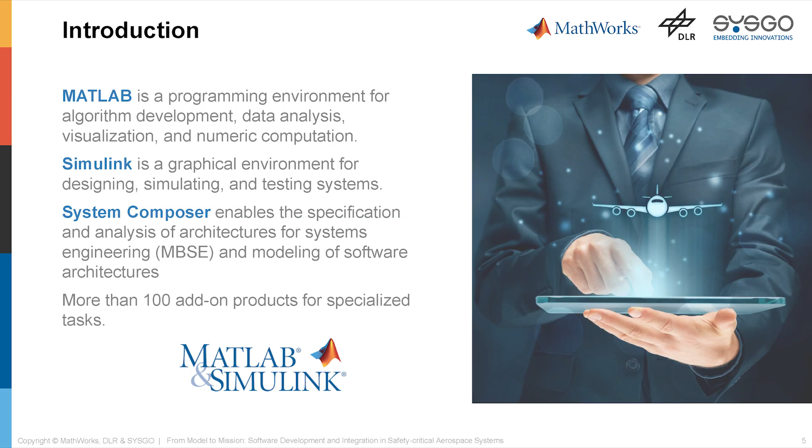Then at the end, what MathWorks does is create a unified environment where we can see System Composer as the main integrator and orchestrator, and it will connect the requirements management solutions, ours or third party. It will allow you to run analysis based on MATLAB, use all the power of Simulink and Stateflow. You have here Simulink Fault Analyzer, Simulink Test, all the verification tools, and bring designs also from third-party, legacy code, etc. So the idea is that you have an environment that will help you with this.

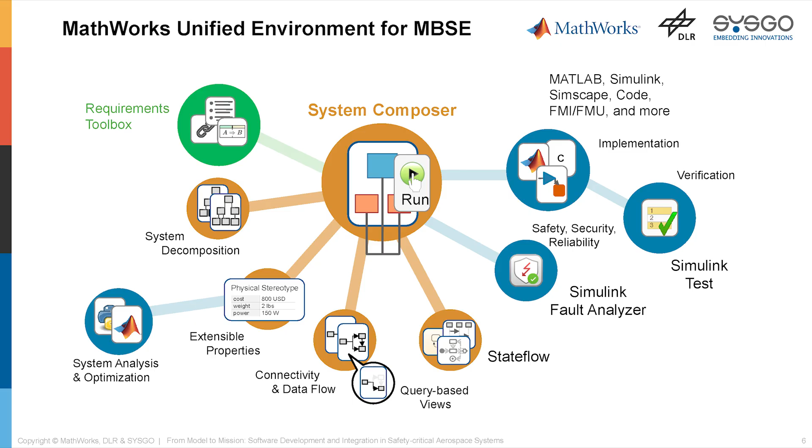As MathWorks, we collaborate a lot with many companies and centers. And of course, one of them is the German Aerospace Center, DLR. So Bojan Lukic is going to give you a few words about it. Hello, Bojan. Hello, Juan. Thank you for the introduction.

Coming to the introduction of the German Aerospace Center. So the German Aerospace Center, or in short DLR, is Germany's national space agency. I sometimes like to call it Germany's NASA for people who are not completely familiar with the institution. And we're doing various research, mostly in transportation, so space, aviation, but also automotive, but then also in energy, security, digitalization. At DLR, we're doing planning and implementing of the country's space program, and we develop sustainable solutions for societal challenges.

So at DLR, as a research institution, we're trying to publish as much of our work as possible and show our results in papers. So if you're interested in our work in general, I recommend looking at our papers where we show more technical details of our work.

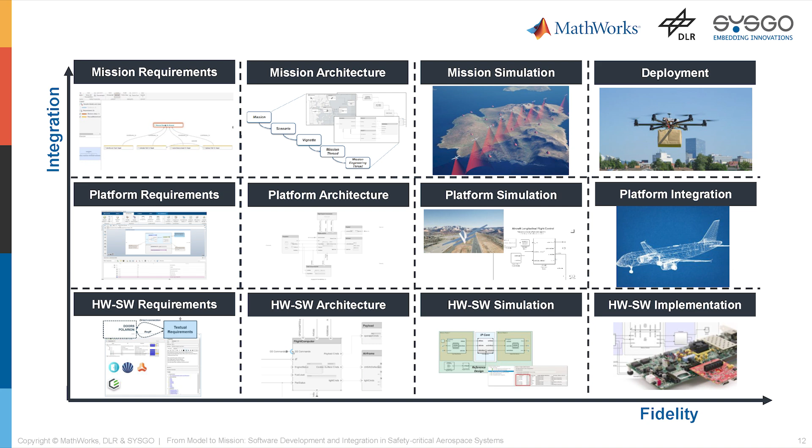So we do not need to have all levels of readiness to move around the canvas. What is very powerful is that we can actually start integrating early, we can start validating early, and this is one of the main advantages of model-based design, shifting left and doing things earlier. Today, we are not going to talk about the whole design lifecycle, but we are going to touch systems and software design all the way until the integration with a real-time operating system, PikeOS, that is designed by SYSGO.

Since we are today talking about systems integration and software architectures, we need to mention, like Franz introduced already, what IMA, or Integrated Modular Avionics, is. IMA is an aircraft electronics architecture that consolidates many previously separated avionics functions onto shared computing resources. Instead of having one dedicated computer per function, the old federated model, IMA hosts multiple avionics applications on common processing modules. This is an approach that has been used for the A380, A350, F-35, and so on.

This in general requires following standards like ARINC 664, ARINC 653 for partitioning. We will see a lot more later. And then the application that we will show today, and Bojan will explain a bit later, is how being able to reconfigure dynamically at this level can be a great asset to increase performance, but also safety.

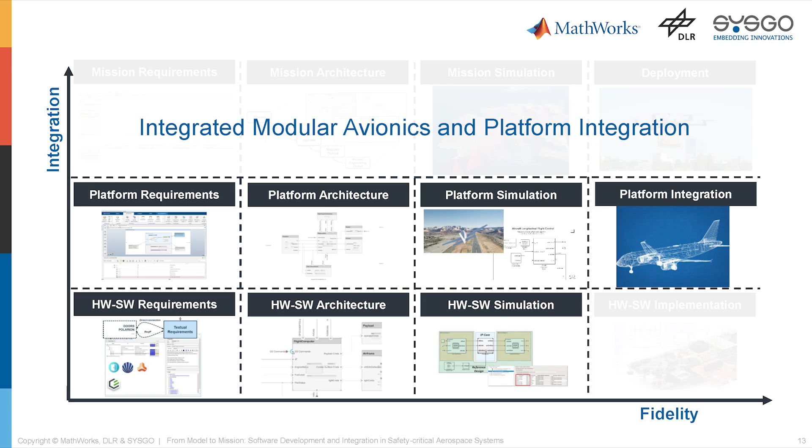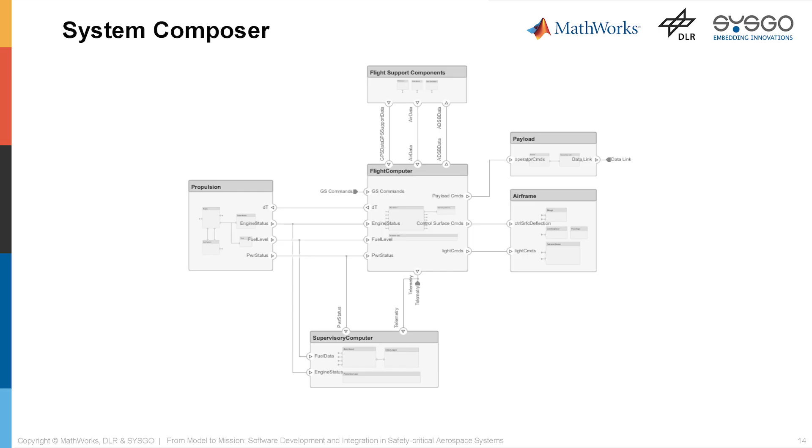But before Bojan explains this in more detail, I would like to show a bit of how we start capturing these designs. For that, let me introduce what System Composer is. I already mentioned it a bit as an orchestrator, as this integration platform. Remember, this is a layer on top of Simulink. In this case, this is just showing a small example of an architecture of a drone. In System Composer, one can capture a certain behavior using, for instance, activity diagrams. We can also capture these using sequence diagrams.

Then, since it is expected that we will have complex models with different layers, with many blocks, it is also possible to have different views. We can extract different views from these. What does this mean? I can extract only certain parts of my model. I can extract only the functional level. I can extract the physical level, etc.

Then you can create, for example, a functional architecture and physical, like I said, and then using the allocation editor, you can assign those different layers, and then you can play with different scenarios. And this is very important because one of the things that you can do is capturing metadata from your models. This will be very important to capture what we will see later, right?

The software architecture, that is something that we can convert into something that PikeOS can deal with. And this metadata is captured via stereotypes. What is also very, very powerful is that MATLAB has an API that can read and write from these stereotypes. So you have all the never-ending analysis possibilities that MATLAB is providing. So you see a couple of features from what System Composer can do and when to use it.

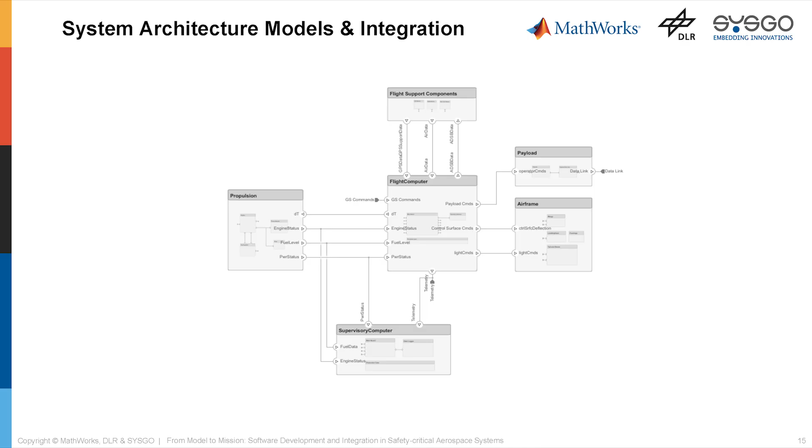Then, since we're talking about fidelity and integration, imagine that you have a model in System Composer. This is exactly the same model as before, but you have different levels of readiness from the different components. So you could connect your model directly to the flight control computer, provided that you have an implementation already. This is, for example, using hardware-in-the-loop fashion.

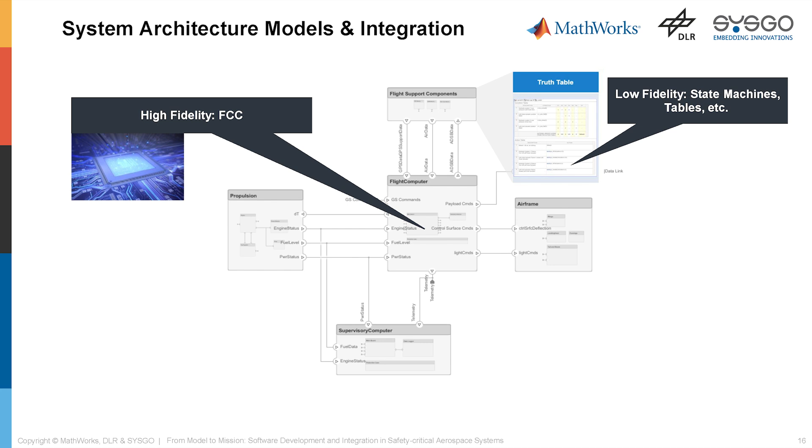But then you might have other parts that are represented only by simple state machines or truth tables, or you might have already some detailed behavioral models in Simulink of your algorithms. Of course, within Simulink, you can have different levels of fidelity as well. Or you could even have code. You might have some legacy code. You might have other models that are coming from other tools and that you're bringing using FMI or FMU.

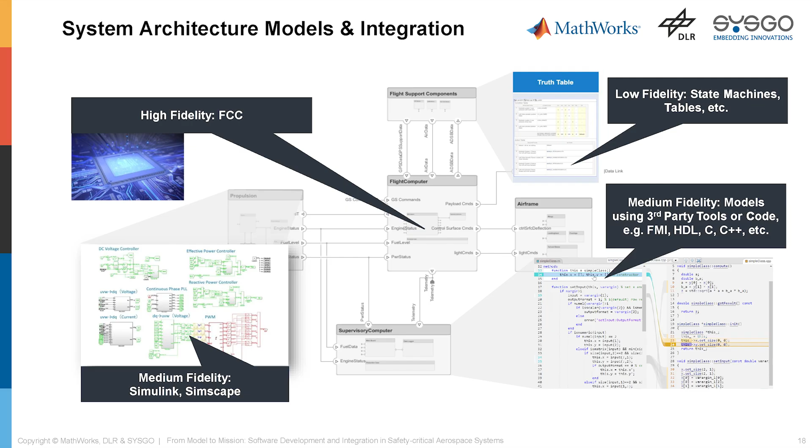So the idea, once again, is that you can architect your system or your system of systems in System Composer, and then you can run simulations from there, mixing these levels of fidelity. This is very powerful. At the same time, we can go one step farther. I already mentioned the hardware in the loop. Well, via hardware in the loop, we can bring the human in the loop, for example.

If we have a real-time machine, in this case, this is the drone actually connected with Speedgoat, and then we have a human in the loop that is controlling the drone. We also have, of course, the connection with the visualization and 3D environments. So once again, the idea is having the different levels of fidelity can be mixed, and that we can go and iterate and add different variants. We can add different levels of readiness, and then we can continue working with this.

But then what we're going to see today is what it means to have all these, capturing an architecture that can be an IMA architecture, and how it could be reconfigured. So, Bojan, I think if you can explain a bit more what this means, this would be very illustrative.

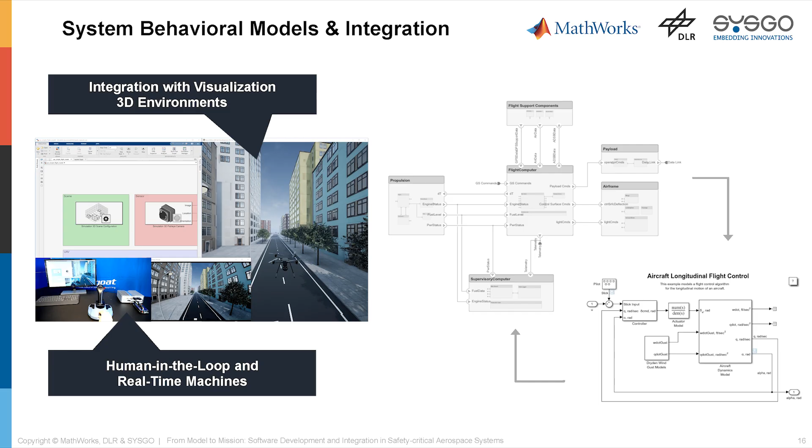Yes, thank you, Juan. So we heard now from Juan the main theme of this presentation and the platform that we're working with, which is Integrated Modular Avionics. But to demonstrate further how we can develop such a system with the previously introduced tools, we would like to introduce a use case, which is dynamic reconfiguration.

What is dynamic reconfiguration? So simply said, in the context of safety critical systems, dynamic reconfiguration is the reconfiguration of functions or applications within the system. And it is used for improved resilience and dependability of the system. And it enables the system to adapt to unforeseen conditions such as faults and maintain safe operation.

So if we think about machine learning algorithms, which are talked about a lot recently, and the idea of using machine learning algorithms and more autonomy in avionics systems in the future, we might want to add some kind of safety net or safety layer, which could be dynamic reconfiguration. So in case this autonomous component in our system goes rogue or has some faults, we can fall back to a component which is maybe safer, and this component can then take over functionality again in our system.

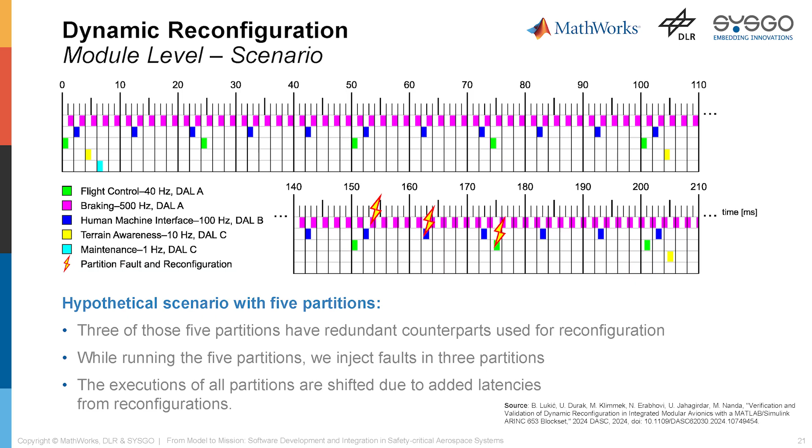So we have to think about the added overhead when we do something like reconfiguration. We can't just say, okay, here's our system, we would like to have a safety net, we're doing dynamic reconfiguration to make the system more dependable. No, we also have to think about the implications of that. So there's going to be some added overheads because we're using additional functionalities to do the reconfiguration and set up spare partitions, for example. But this is just one example. I added another reference here at the bottom right of this slide, which you could, of course, also check out.

And dynamic reconfiguration is also aligned with a lot of standards and guidances found in aerospace and especially aviation and avionics, like, for example, DO-297, which specifically talks about configuration data, which may be used for adaptation of the software, or ARP 4754 and 4761, which talk about redundancy, monitoring, and partitioning, as well as component failure and reconfiguration scenarios coming from that.

And coming back to the overarching topic, so Juan talked before about modeling the overall software architecture first on a high level, maybe with a single source of truth methodology, and then exporting the metadata and generated code from that, which we can do from Simulink as well. And we're also doing this here, which we're going to show in the demonstration later.

This metadata and the artifacts can be imported in CODEO, which is SYSGO's integrated development environment, to create a PikeOS image, which can then be loaded on a target platform. But before we show the demonstration, Matthias is going to show us a little more PikeOS.

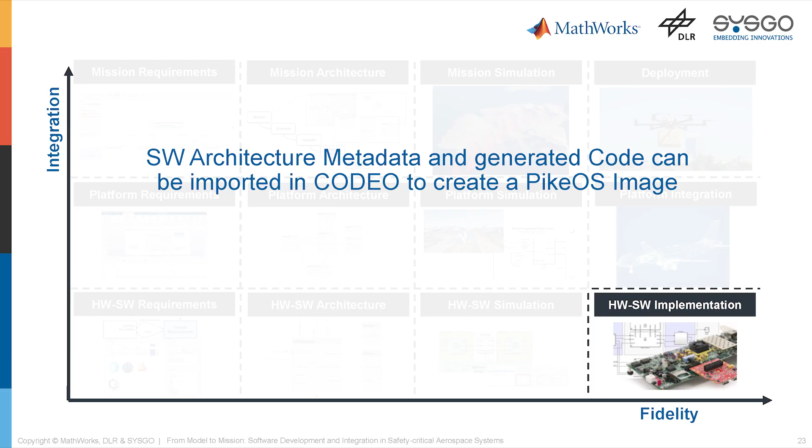Thank you, Bojan. I will start with an introduction to PikeOS and how SYSGO's tools simplify the integration of the previously presented architecture on an embedded system.

PikeOS is an embedded operating system designed for safety and security applications. It combines the determinism of a real-time operating system with the flexibility of a hypervisor. This means in reality you can host critical applications alongside rich guest operating systems thanks to its separation kernel architecture.

PikeOS provides the separation environment through partitions, which can be thought of as containers to which processor time and resources can be allocated. Within these partitions, multiple application environments are supported. They include PikeOS native to run without any overhead, or APIs like POSIX or ARINC 653 for easy porting of existing applications, and by using modern hardware virtualization techniques, also other operating systems like Windows or Linux.

These environments can also be combined in a single system, providing a mixed criticality architecture where applications of different severity or criticality can coexist on the same hardware platform. If one partition fails, it will not influence the others. PikeOS is available for different architectures like x86, ARM, PowerPC, or RISC-V. It has built-in multi-core support.

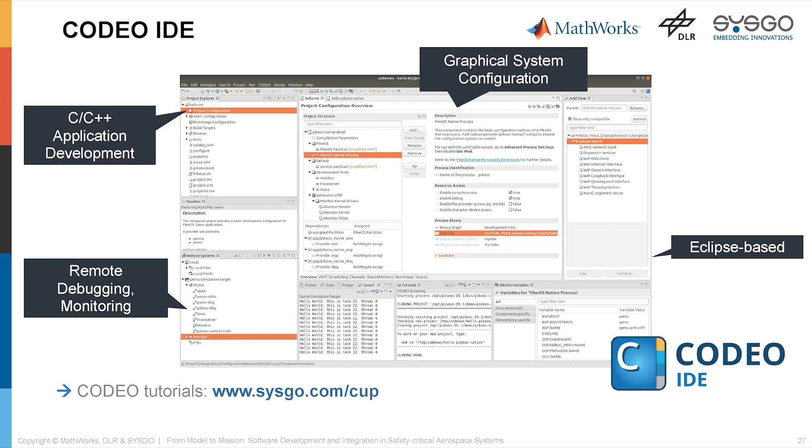CODEO also includes comprehensive little helpers to finish embedded projects efficiently. It supports remote debugging down to the hardware instruction level. And with the addition of PikeOS development tools into the system image, you get access to detailed runtime information through target monitoring, where running processes, threads, and system resources can be analyzed. To get an idea of the environment, we also have mini tutorials showing the essential functionalities of CODEO, so there's a link to have a look at it.

Now here you can see the steps involved in the integration from model to target. The system engineering part was presented by Bojan and Juan earlier, and now I'm focusing on the software integration part. Coming from a MATLAB Simulink model, which uses the ARINC 653 blockset for process definition and partition communication, an XML-based system configuration can be generated. This configuration provides the information transfer from MathWorks model-based engineering into SYSGO tooling for embedded end systems. It includes the partition definitions and associated applications, port-based communication channels, and time scheduling information.

The configuration can then be imported into CODEO to configure a target system for the defined architecture. Because we use the ARINC 653 Simulink blockset, the standardized OS API is used. Simulink models can generate code for this API, which in turn is understood by the PikeOS APEX personality. This means that we can compile the output from Simulink Embedded Coder into a valid PikeOS APEX application executable and put it onto a PikeOS partition.

To create these executables, we can configure Simulink to use the PikeOS toolchain, for which we provide the necessary toolchain definition files. For future enhancements, we are also working on a Simulink compatibility layer to provide support for the PikeOS native API as well. This will allow using the presented workflow also in non-avionics domains, as it removes the dependency on the ARINC 653 API, which is mainly used in aerospace context.

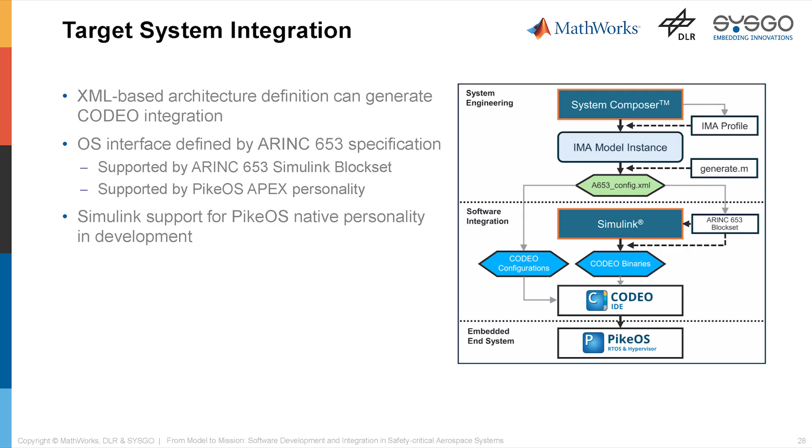With these generation features, the main system architecture can be defined on a higher level, as we saw earlier, and then brought onto the target device with the click of a button. After reviewing the integration setup, Codeo collects the selected applications and puts them together into a runnable PikeOS target image to load onto the hardware.

And there, of course, the runtime analysis tools provided by Codeo can also be used to do evaluation of the final target integrated system. Now that we saw all the steps in the workflow from highest to lowest level, I hand back to Bojan to show you a demonstration of it in our use case.

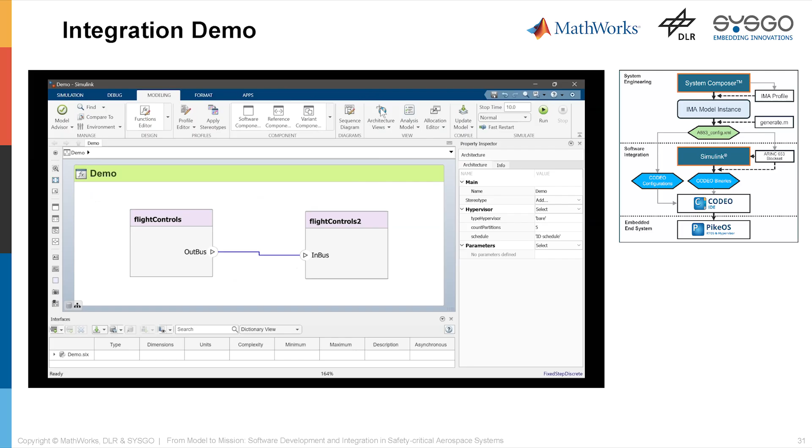Bear in mind that this is a minimal working example because we didn't want the video to be too long. This could scale up as well and be arbitrarily large, but we have only two partitions in this example. We use our custom script to create the XML configuration file, which I talked about before. And we can see we have all the metadata and the information that we need, like the partitions, their duration, periodicity, and their ports.

And from this, with some custom MATLAB scripts, we can create our Simulink model, which also uses a profile or a library. This profile is called ARINC 653 blockset, and it also gives the modeler the obligation to model their system according to some predefined structure, which helps in modeling, of course.

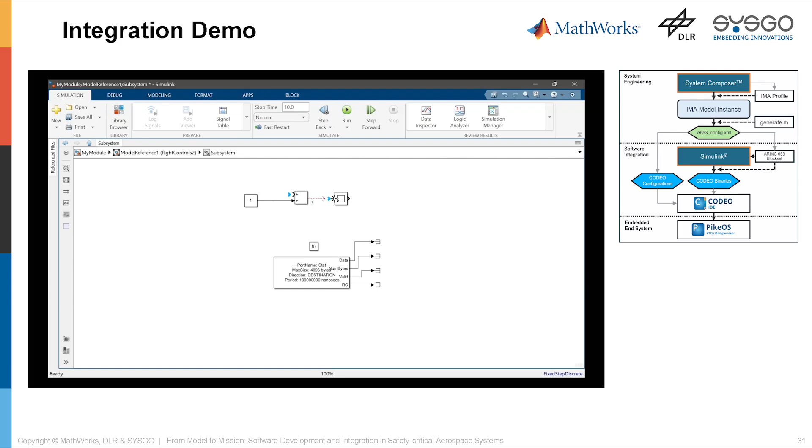Here I'm adding a custom logic to one of the partitions, a very simple logic. It's a counter, just for demonstration purposes. Like I said, it's a minimal working example. And for these two partitions now, which are ARINC 653 partitions, I can generate code in Simulink.

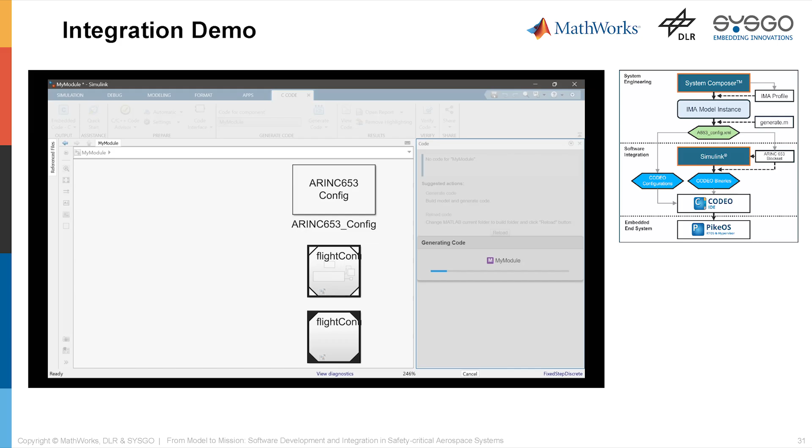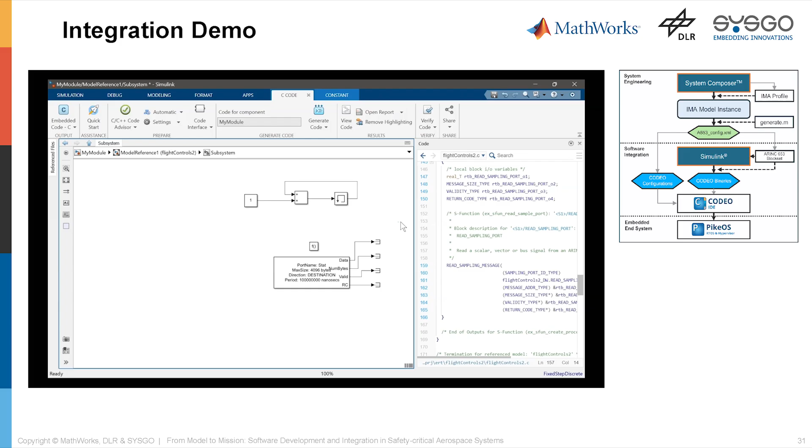So why are we doing that? Perhaps instead of going straight to the binaries, which I'm getting into in a couple of seconds, we might want to generate the code and then work first with the code and customize it. In this case, this is C code. We can see that the custom logic that I modeled before here is also inside of the code. But in this case, we're not directly working with the code, but rather creating the images or the binary files that are loaded in the Codeo development environment later.